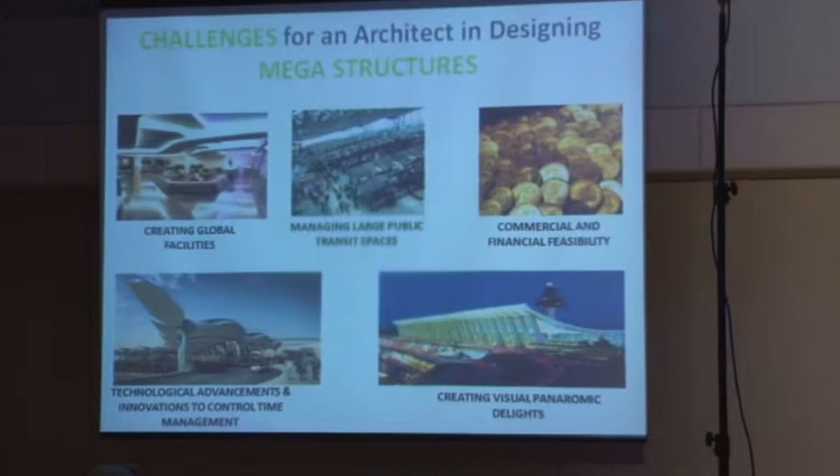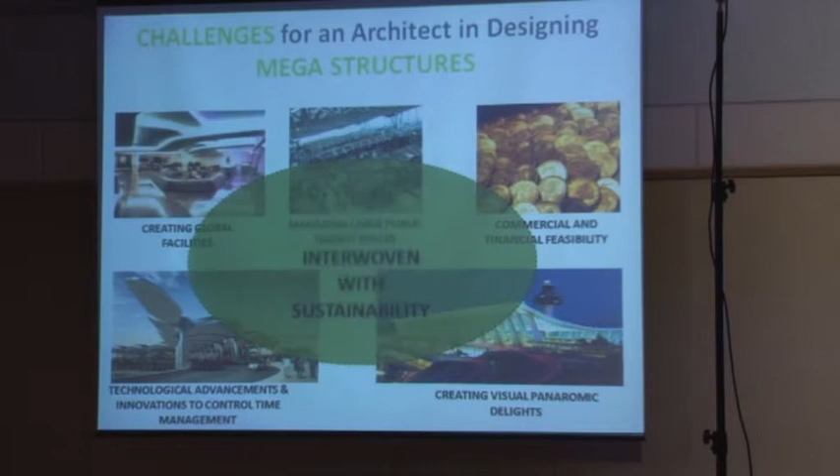So in terms of architecture and in terms of looking at megastructure projects, the architect role is redefined, and the architect has to look through architecture from different lenses. One has to not only create a global facility, but at the same time a public space which is financially viable. And this also gives us a rare opportunity in the life cycle of the country to get new technology in the country, so that's very important. And these global facilities have also to be landmarks of a country which are here to stay for the next 50 to 60 years. So how one can make them sustainable to an extent is also a challenge.

Airports or these mega structures are not sustainable, to be very honest. They are all energy guzzlers. You need megawatts of energy - energy equivalent to a city for one kind of project.

So when we won the global design competition to design the Chennai Airport Terminal in 2007, we got an opportunity to design more than 200,000 square meters of area. I had no idea how much that square footage is or square meters are. So these are the existing facilities: a 3 million capacity terminal and a 6 million capacity terminal, and a city side, which was right there.

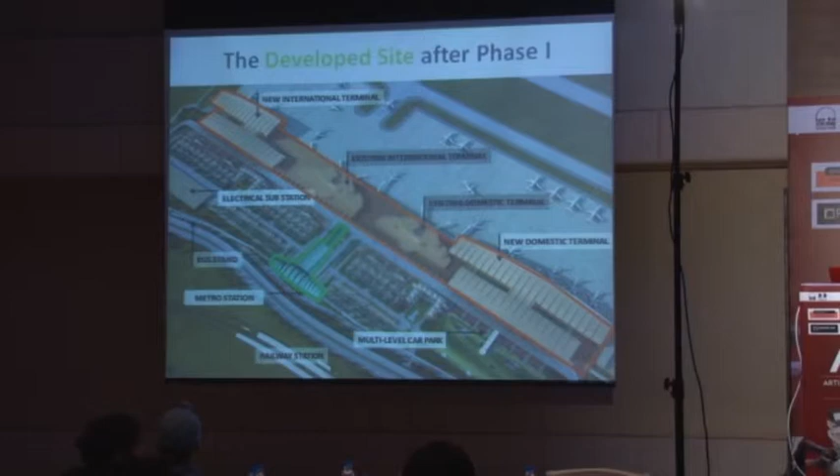So when we were doing the master plan, we said, is there a possibility not just to design the master plan, but also to create an infrastructure piece where you can have all the public modes of transportation seamlessly integrated, so that you don't have to get out from the metro station and go to the terminal, or go from the highway to the metro station. Is it possible that I can take any mode of transportation and go to any other mode of transportation without going out of any of those transportation facilities? So that was one challenge, and we brought all these stakeholders - railways, highways, the airports, and the metro station - together, and we sat with them to create a master plan which is feasible for the next 50 years.

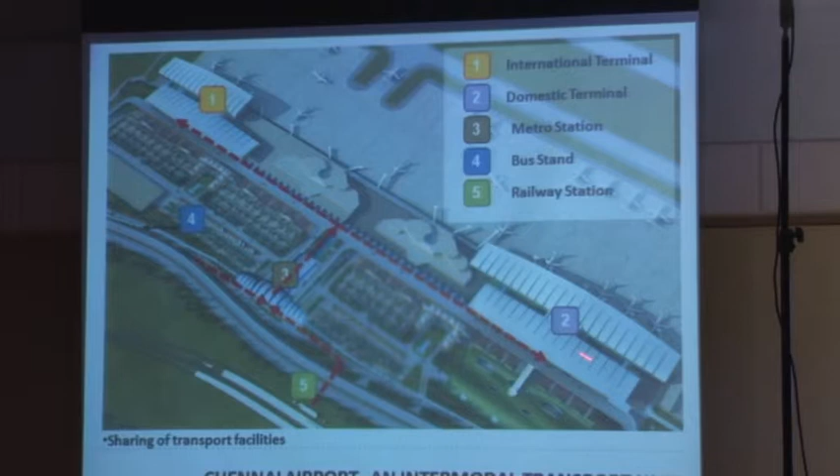We created the international terminal on the extreme left, marked number 1. Number 2 is the domestic terminal, with the substation right here, metro station facility, connectivity between the terminals 1.2 kilometers apart with the metro station, and connectivity with the highway and the railways.

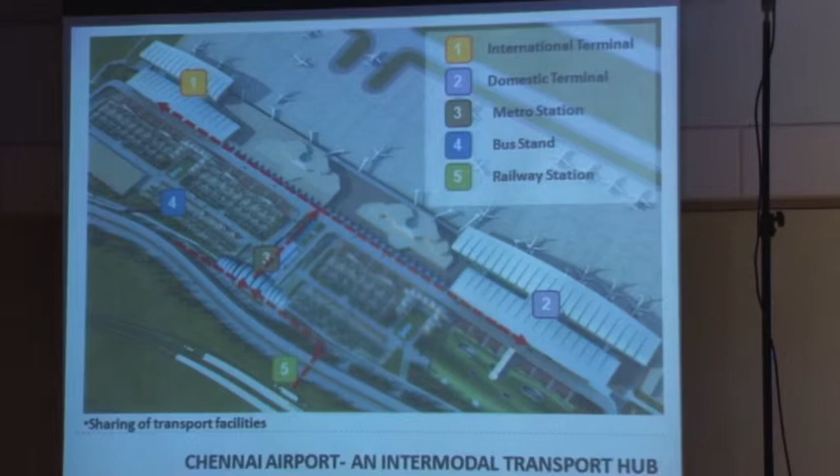To achieve that, after the master plan we were thinking about how the terminals can be envisioned. To create sustainable terminals, it was very important to learn from nature. And we thought, let's look at the bird which has always flown - the idea of the airplane arrived from the bird. So we thought about the bird, we saw its flight, and we wanted to fly. But we had to sit right at the transition point between the land and the air, and create a transition point which can create a pause between this facility.

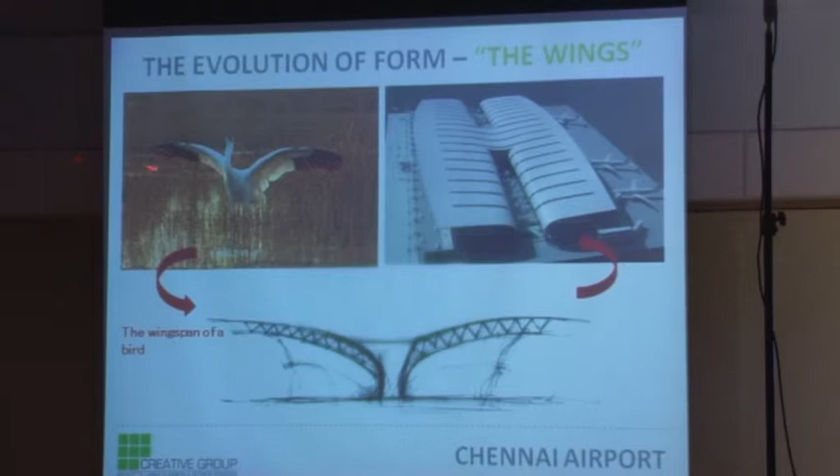So what we thought was, how can we think about the bird, and how can we create a volumetric composition where we create a form which is seamless like a bird. You see these wings, they have no supports. So we have to create a terminal which has no columns - we wanted spaces that are absolutely column free. We took a cue from how organically this could be one monolithic structure. So that's how we came up with the idea that there be no column or beam, but one monolithic structure itself.

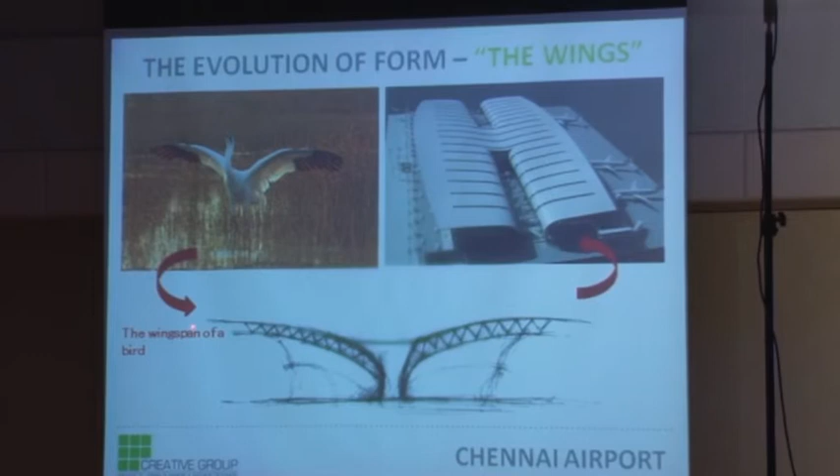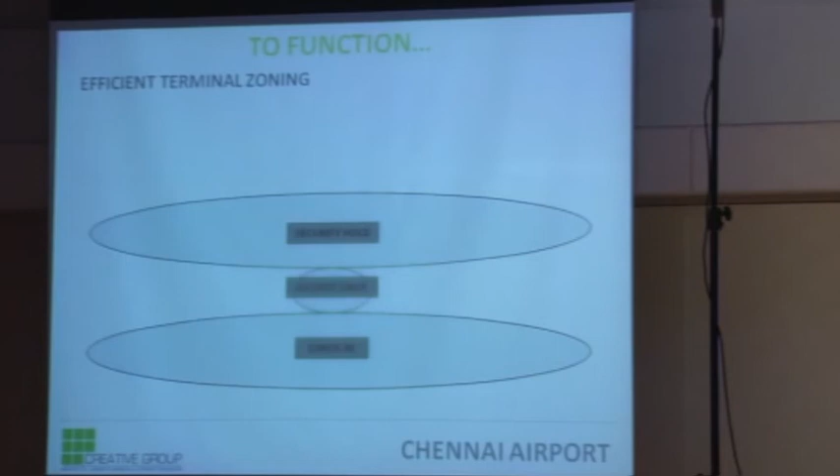So that was the idea of the volumetric composition. The second thing we thought about was how the terminal composition can happen. We took a very simple step of creating volumes in terms of the processes: check-in, security check, and security hold. Looking at these simple things sometimes brings a lot of value to the design idea itself. So we were able to create 7 facets inside the terminal, thereby increasing the daylight possibility from 4 sides to 7 sides.